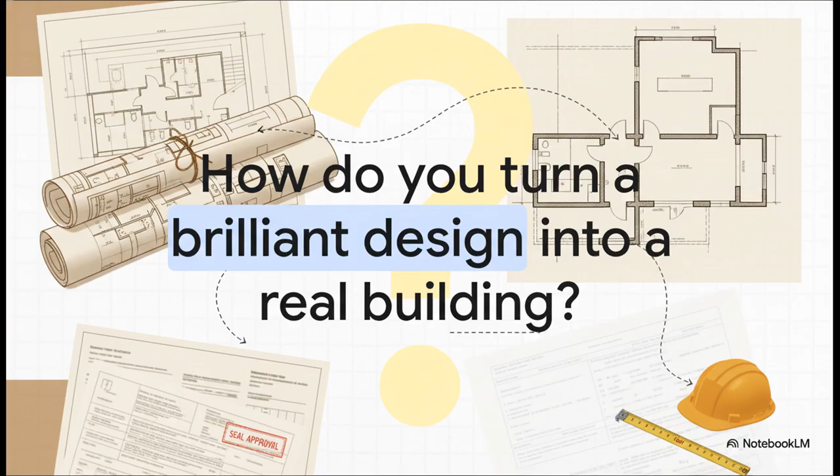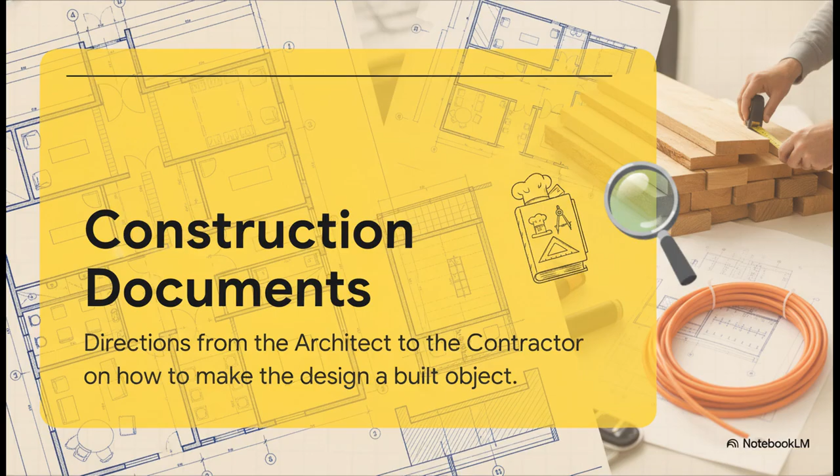So, let me introduce you to the hero of our story, construction documents. I love how the monograph guide puts this. They're literally the directions from the architect to the contractor. Think of them as the ultimate recipe book that tells the builder exactly how to turn that design into a real, physical building.

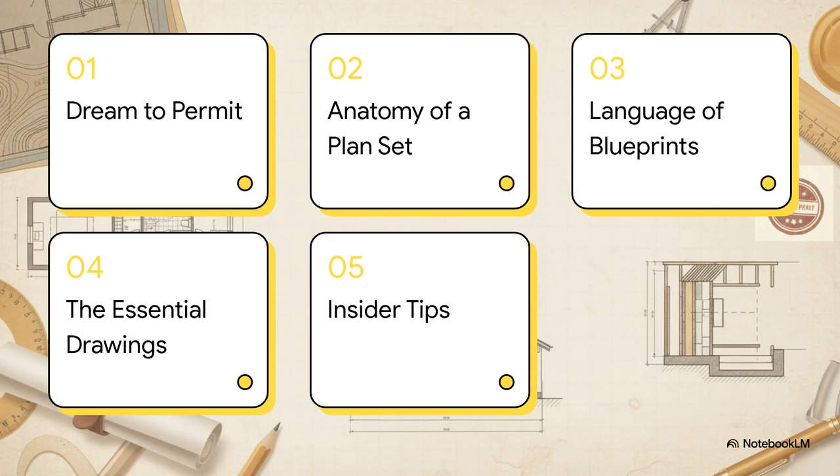So here's our game plan. We're going to go from the big picture dream to that permit. We'll break down what a plan set really is, learn the language of blueprints, walk through the drawings you absolutely have to have, and then, my favorite part, we'll get into some insider tips for getting that stamp of approval. Okay, let's start the journey. The whole key here is to stop thinking of this as a bunch of annoying hurdles. Instead, see it as a clear path with clear steps that takes you right from your idea to having that permit in your hand.

So what's actually in a plan set? What are we talking about here? Well, it really just boils down to two key ingredients. And once you understand these two, the whole thing starts to make a lot more sense. So on one hand, you've got the drawings. This is the visual stuff. It shows what goes where. But then you have the specifications or specs. This is all the written info that describes how to build it and with what materials.

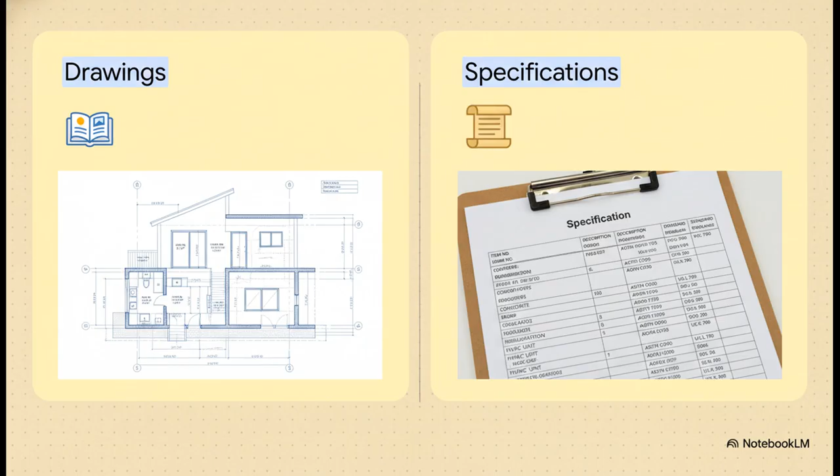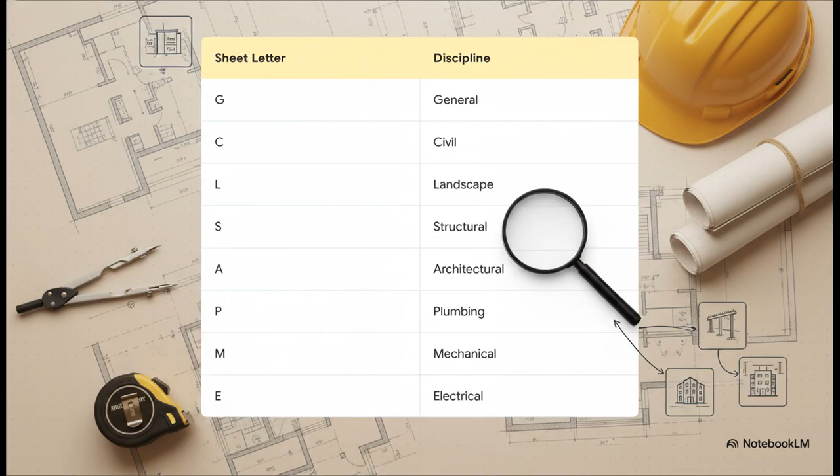It's like a cookbook, right? The drawings are the pictures of the finished dish, but the specifications are the detailed ingredient list and the step-by-step instructions. You need both. Now, you might be wondering how pros keep track of all this, sometimes hundreds of pages. It's not just a random stack of paper. They use what's called the U.S. National CAD Standard. See, each type of drawing gets its own letter. A for architectural, S for structural, E for electrical, and so on. It's a simple, brilliant system that keeps everything organized so anyone can find what they need instantly.

All right, every profession has its own language, its own lingo, and construction is no different. So in this section, we're going to learn the basics, the essential vocabulary you need to know to create plans that are actually clear and don't cause confusion down the line. You know, when you really boil it down, any good drawing, from the simplest to the most complex, depends on just three things. You need accurate dimensions, you need the correct scale, and you need clear, concise notes or annotations. If you nail these three, you are well on your way.

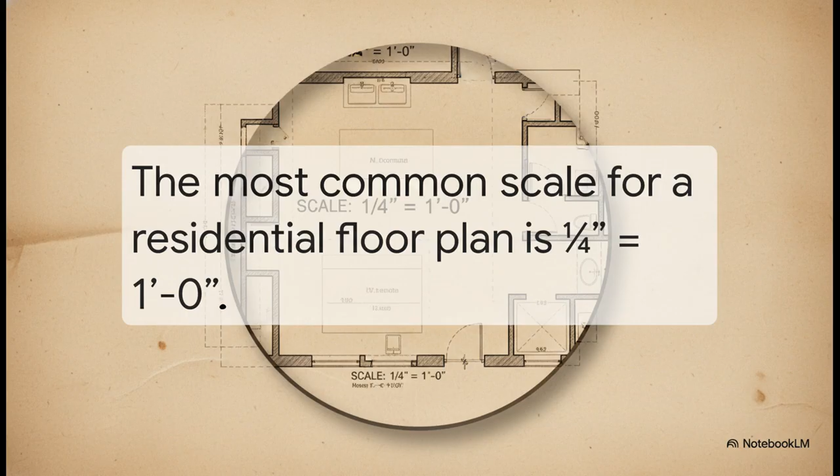Okay, let's zoom in on scale for a second, because this is so important. For most residential floor plans you'll see, the scale is going to be 1/4 inch equals 1 foot. It's the industry standard, but what does that actually mean? It means we're working with a ratio of 1 to 48. In other words, any object you see on that piece of paper is 48 times bigger in the real world. And here's the simple math behind it. Every 1/4 inch on that drawing represents 48 of those exact same 1/4 inches in real life. And what are 48 1/4 inches? Well, that's 12 full inches.

Or, you guessed it, exactly 1 foot. Once that clicks, the whole idea of scale suddenly becomes way less intimidating. Okay, we've got the language down. Now, let's actually start putting together the plan set.

We're going to walk through the essential pages that you've got to have to get that permit. So, while a full professional set of drawings can be huge, these 5 are really the heart of any residential permit application. We're going to look closely at the first 3. The title sheet, which is basically the cover, the site plan, showing the whole property, and the floor plan, showing the layout. The other 2, exterior elevations and the foundation plan, are just as crucial.

They show what the house looks like from the outside and how it's actually anchored to the ground. You have to get all 5 of these right. Step 1, the title sheet. And this isn't just a pretty cover page, okay? It's the project's official ID card.

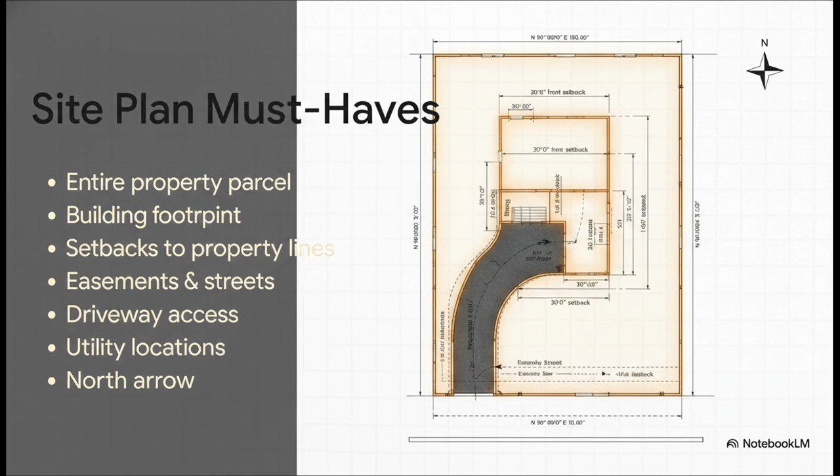Next up is the site plan. This is that bird's eye view, showing how the new building fits onto the land. And the plan reviewer is looking for very specific things here. They need to see how far the building is from the property lines. Those are called setbacks. They're also looking for things like where the driveway is, where the utility lines connect, and of course, that little north arrow so they know the building's orientation.

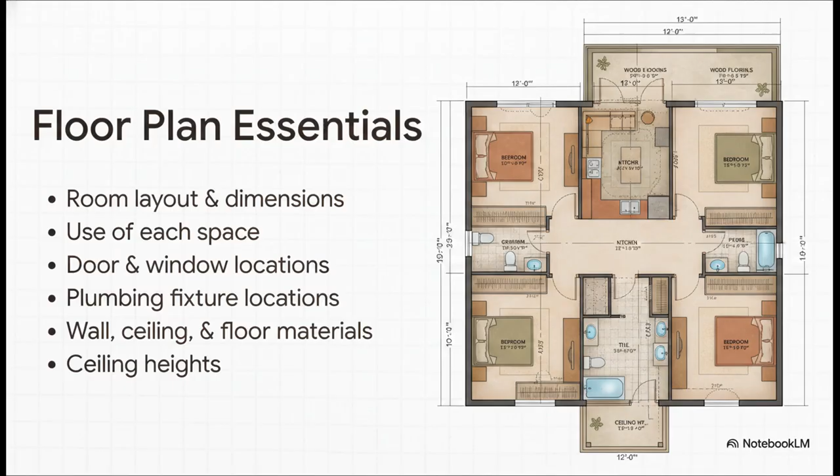And now we get to the one everyone knows, the floor plan. But a floor plan for a permit needs way more detail than one for a real estate brochure. The building department needs to see exact dimensions for every room, what each space is used for, like this is a bedroom, this is a kitchen, and the precise location and size of every single door and window. Even the plumbing fixtures have to be shown. Every detail counts. Okay, we have covered the technical stuff.

A plan reviewer has a specific checklist of things they need to verify for code compliance. If you flood the drawings with extra notes and details they don't need, you're just making their job harder. You're creating clutter. And that makes it more likely they'll either miss something important or, worse, find some tiny, irrelevant detail to question you about. The goal is clarity, not just dumping information.

But really, out of all the advice you'll ever get, this is the absolute golden rule. Every city, every county, every jurisdiction is a little different. So before you even think about drawing a single line, go to your local building department's website and find their official permit submittal checklist. That document is your holy grail. It tells you exactly what they want.

So at the end of the day, you have to remember that your plans are so much more than just lines on a page. They're a communication tool, they're a legal document, and in many ways, they're the very first contract of your entire project. So the question you have to ask yourself is, are they telling the right story?